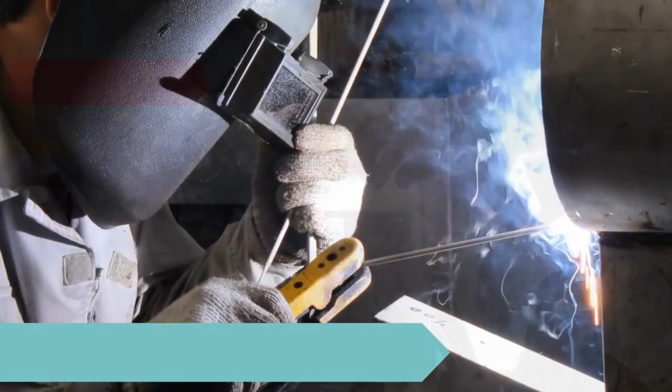First location in welding workshop. First, welding process. The welding process involves melting metal using high heat. When the metal is heated, hazardous metal particles and chemical compounds are released into the air in the form of smoke and dust.

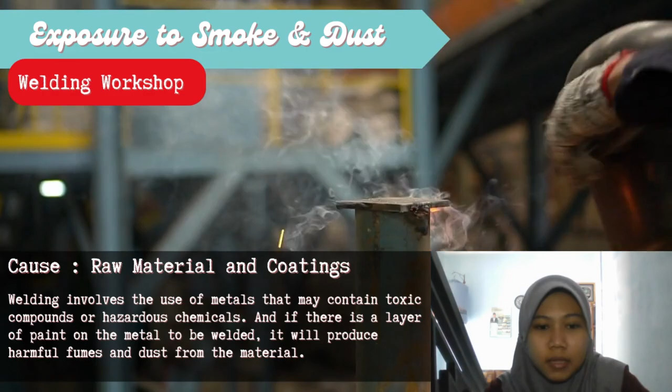The second is raw material and coatings. Welding involves the use of metal that may contain toxic compounds or hazardous chemicals. And if there is a layer of paint on the metal to be welded, it will produce harmful fumes and dust from the material. There are two effects. First, respiratory disturbance. Exposure to welding fumes and dust in the long term can cause respiratory problems such as irritation of the respiratory tract, coughing, shortness of breath, asthma, and even chronic lung disease.

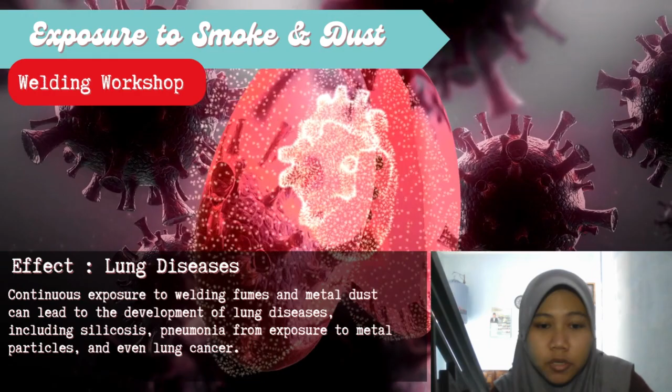The second is lung disease. Continued exposure to welding fume and metal dust can lead to the development of lung diseases, including silicosis, pneumonia from exposure to metal particles, and even lung cancer.

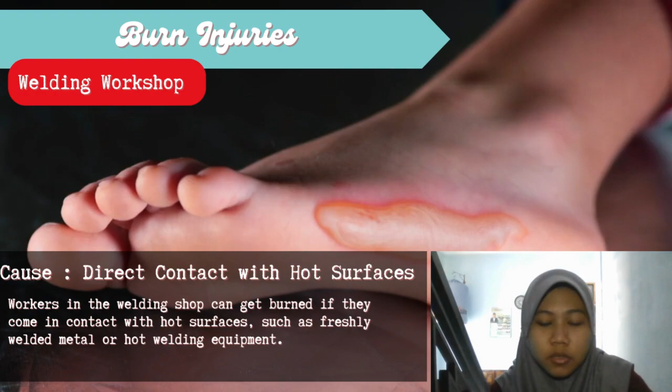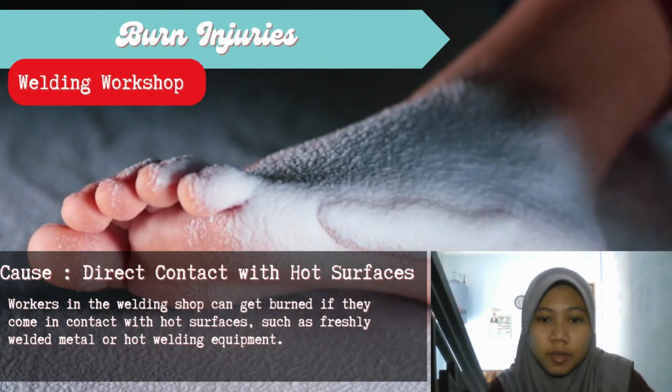The second hazard in welding workshop is burn injuries. First, direct contact with hot surfaces. Workers in the welding shop can get burned if they come in contact with hot surfaces, such as freshly welded metal or hot welding equipment. The second is spark and hot metal. If workers do not use proper personal protective equipment, such as fire-resistant clothing or face shield, the risk of burn increases.

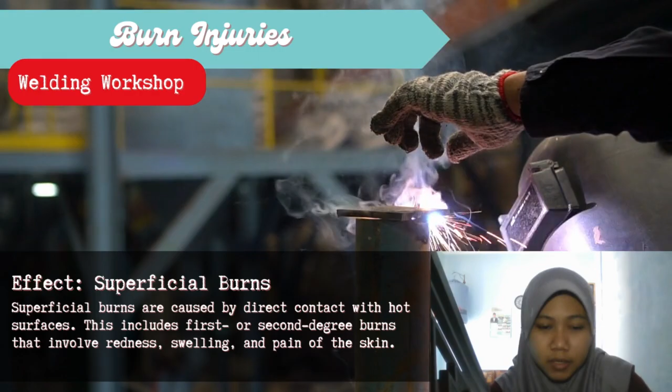There are two effects. First, superficial burn. Superficial burns are caused by direct contact with hot surfaces. These include first or second degree burns that involve redness, swelling, and pain of the skin. The second is deep burn. This burn can cause deeper tissue damage, blister formation, and severe pain.

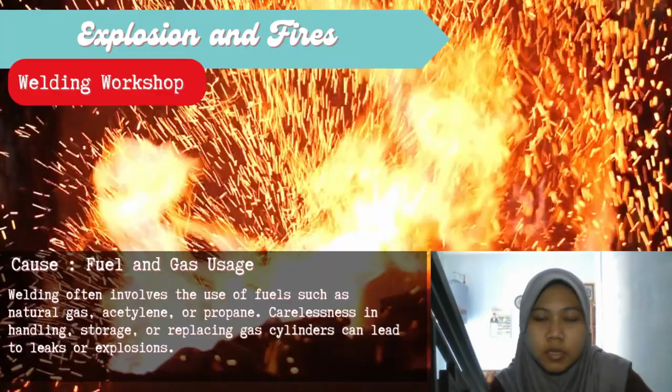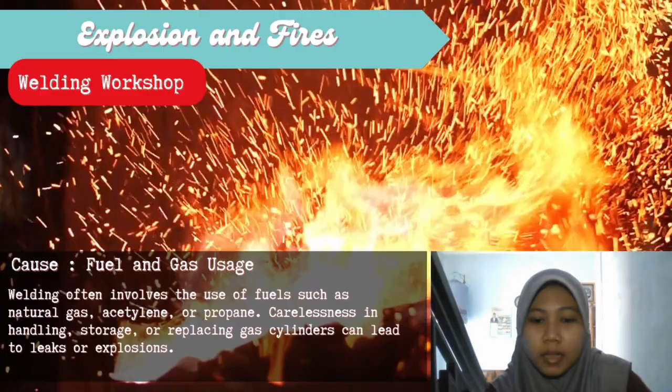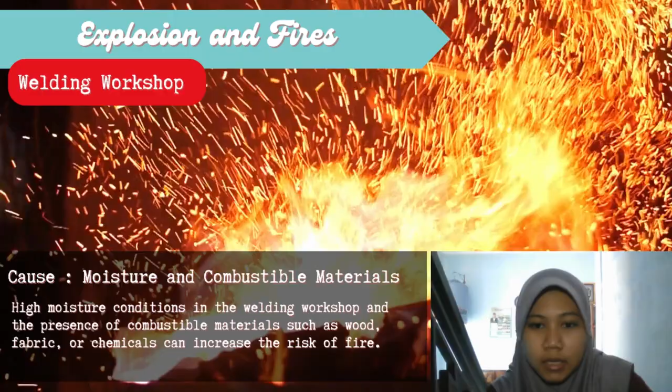The third hazard in the welding shop is explosion and fires. There are two causes. First, fuel and gas usage. Welding often involves the use of fuels such as natural gas, acetylene, or propane. Carelessness in the handling, storage, or replacing gas cylinders can lead to leaks. The second is moisture and combustible material. High moisture condition in the welding workshop and presence of combustible material such as wood, fabric, or chemicals can increase the risk of fire.

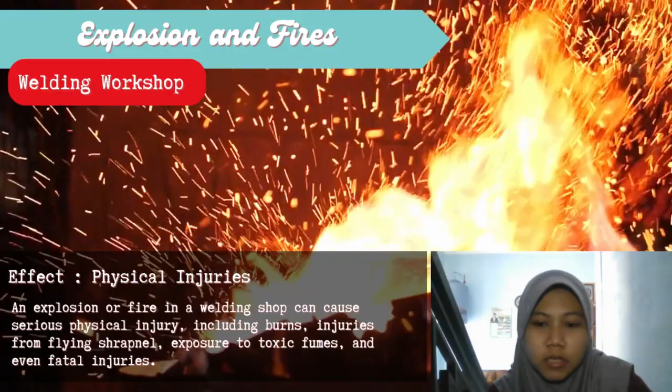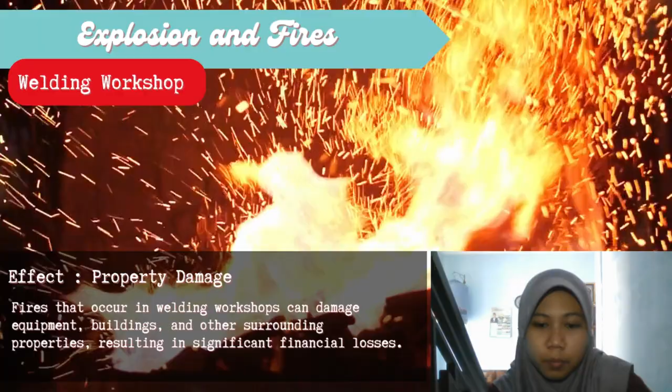There are two effects. First, physical injuries. Explosion or fire in the welding workshop can cause serious physical injuries, including burns, injuries from flying shrapnel, exposure to toxic fumes, and even fatal injuries. The second is property damage. A fire in welding workshop can damage nearby equipment, buildings, and other property, resulting in significant financial loss.

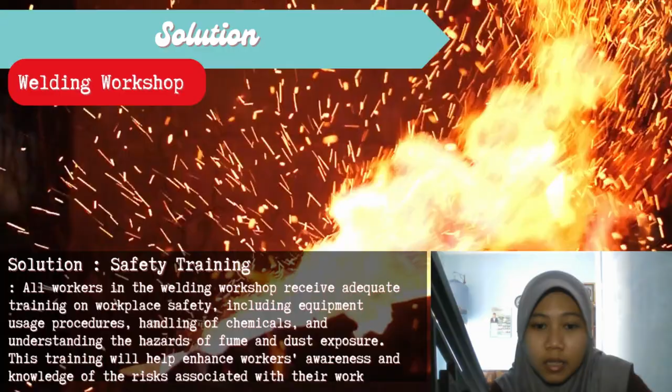We have solutions. First, safety training. All workers in the welding shop receive training on workplace safety, including procedures for using equipment, handling chemicals, and understanding the danger of exposure to smoke and dust. This training will help increase worker awareness and knowledge of the risks associated with their work.

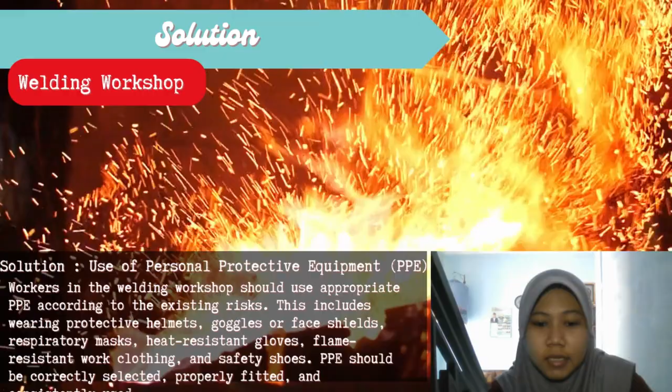The second, use of personal protective equipment or PPE. Workers in the welding shop must use PPE according to the risk involved. This includes wearing a protective helmet, goggles or face shield, breathing mask, heat-resistant gloves, fire-resistant work clothing, and safety shoes. PPE must be correctly selected, properly fitted, and used consistently.

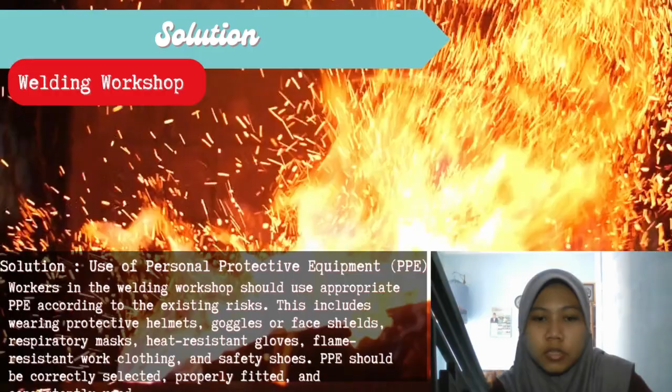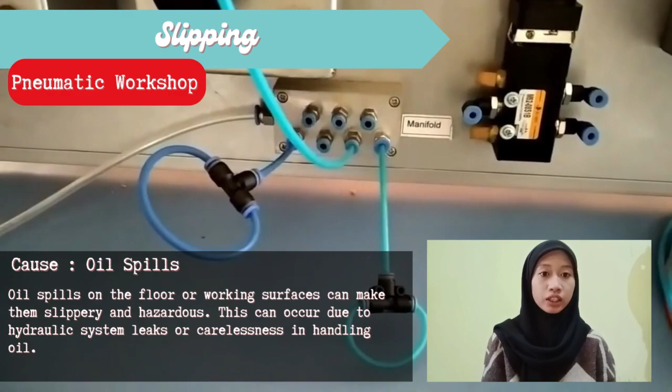Okay, and the next location is hydraulic and pneumatic workshop. And the causes of this hazard are as follows. 1. Oil spills. Oil spills on the floor or working surface can make them slippery and hazardous. This can occur due to hydraulic system leaks or carelessness in handling oil. 2. Oil overflow. If there is an excess of oil on the working surface or oil spills while working with the hydraulic system, the surface becomes slippery, increasing the risk of slipping. Additionally, leaks during hydraulic system operation can cause oil to escape.

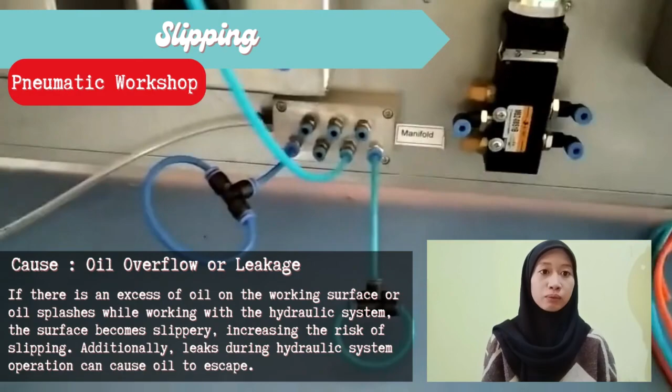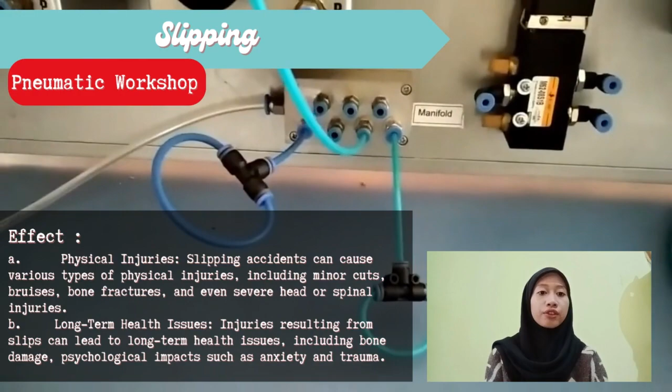The effects resulting from this hazard are: 1. Physical injuries. Slipping accidents can cause various types of physical injuries including minor cuts, bone fracture, and even severe head or spinal injuries. 2. Long-term health issues. Injuries resulting from slips can lead to long-term health issues, including bone damage, psychological impacts such as anxiety or trauma.

And then the solutions that can be implemented to minimize the occurrence of this hazard are as follows. 1. Cleanliness and maintenance. Ensure that the workshop remains clean and free from oil spills. Regular cleaning and proper drying of spilled oil can reduce the risk of slipping. 2. Use of personal protective equipment or PPE. Workers should utilize appropriate PPE including slip-resistant footwear and other safety devices such as helmet and gloves.

Okay, and the last location is CNC workshop. The type of hazard is cutting and pinching hazard. CNC machines utilize high-speed rotating cutting tools. Operators must be cautious of the risk of being caught or cut by the cutting tools or moving workpiece.

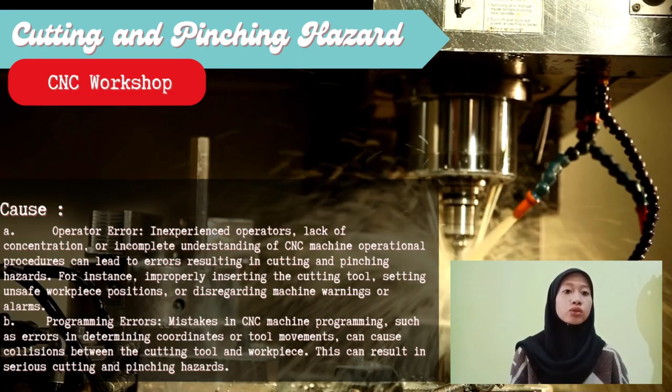The causes of this hazard are as follows. 1. Operator error. Inexperienced operators, lack of concentration, or incomplete understanding of CNC machine operational procedures can lead to errors resulting in cutting and pinching hazard. For instance, improperly inserting the cutting tools or setting unsafe workpiece position. 2. Programming error. Mistakes in CNC machine programming, such as errors in determining coordinates or tool movement, can cause collision between the cutting tool and workpiece. This can result in serious cutting and pinching hazard.

And the effect resulting from this hazard is: first, physical injuries. Cutting and pinching hazards can cause serious injuries to CNC machine operators. Injuries may include cuts, pinches, tears, or even finger, hand, or arm amputation.

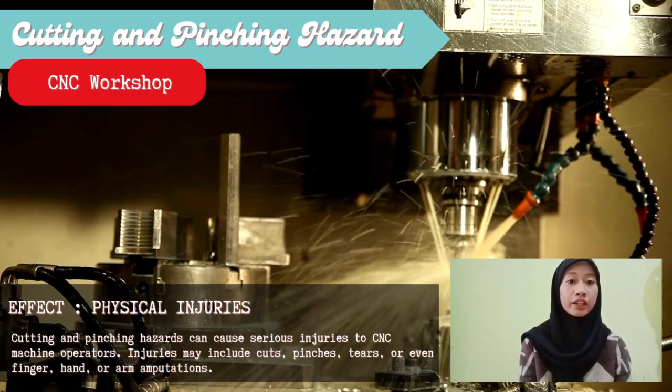And the solutions that can be implemented to minimize the occurrence of this hazard are as follows. 1. Provide adequate training for operators on safe working procedures and CNC machine programming. 2. Ensure careful and verified CNC machine programming before commencing operation. 3. Regularly inspect and maintain the machine to ensure good operating condition. And 4. Use appropriate personal protective equipment such as protective eyewear, gloves, and pinch-resistant footwear.